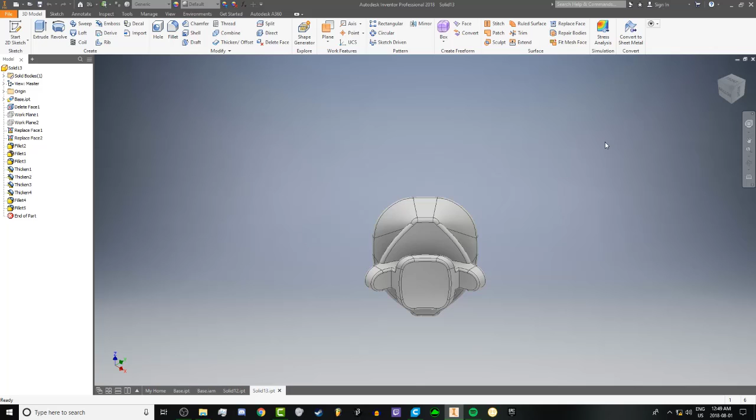What's going on, guys? This is Multi-Cubing here, and in this extra episode of the 2x2 tutorial series, I'm going to show you quickly how to make both the two other main types of locking mechanisms for a 2x2. The first one I'm going to show you is the mechanism that the Chuwen 2x2 uses, where a corner locks into the edge.

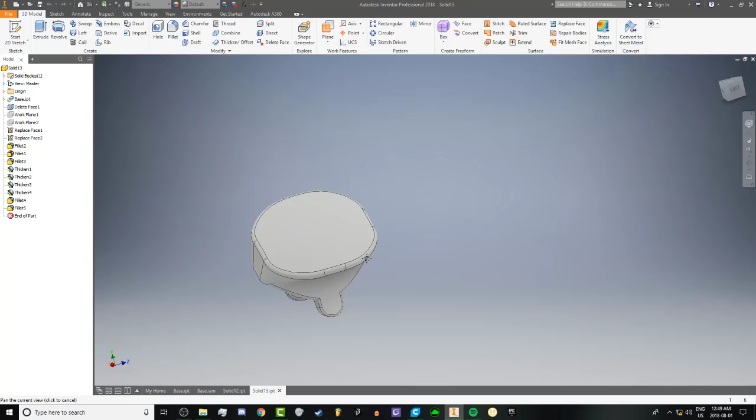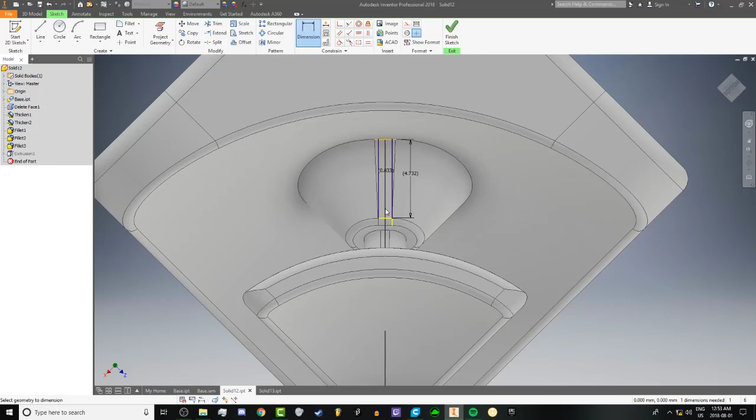Okay, so here's how you want to do this. First thing you want to do on the corner is make something that is going to go into the 2x2 piece. So it's just under a millimeter thick, which is definitely too thin. So I'm going to undo that.

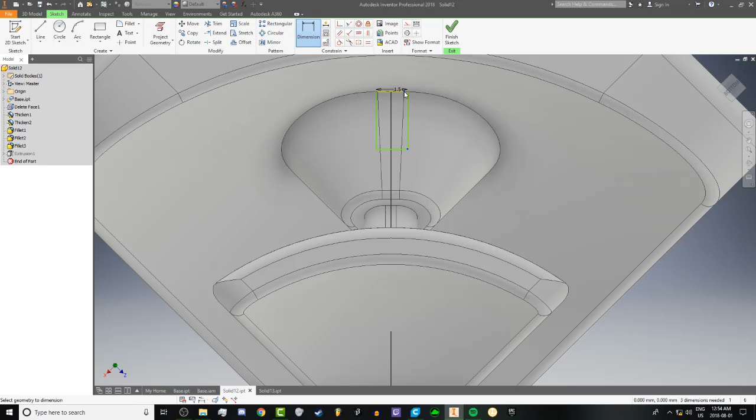So now we can actually dimension this. 1.5, and make this 3. And then we're just going to make a point in the center of this, and then again in the center of this, and then we can make an axis from there to there. Good.

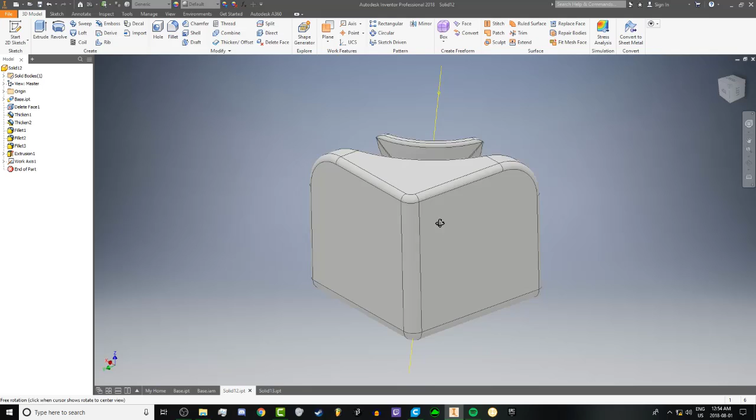Now we can circular pattern this 3 times. Perfect. So now we're just going to do a couple fillets.

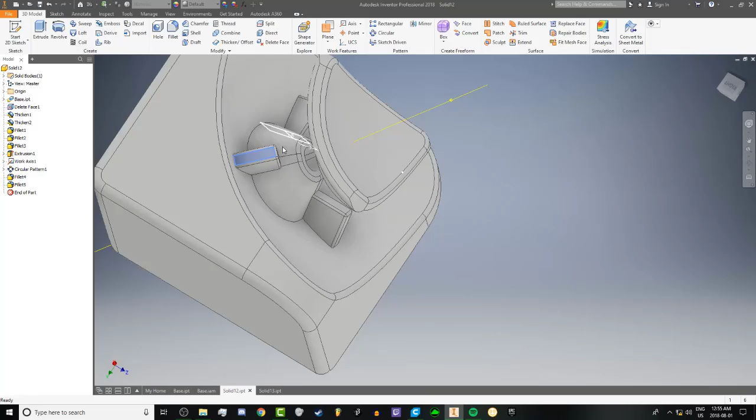Okay, so with that done, we're going to move on and do the work on the edge. Remember, it's 3 long and 1.5 wide. Then we're going to go to the edge and do the same kind of thing.

Now, because of the weird orientation of this edge, as you can see, I would need this axis to be going right through here, or be parallel to a line going right through there. But since everything's off by a few degrees, it's effectively impossible to make the rectangle cut out in this edge that is needed. However, you could probably do that with another edge, but I'll explain how you would do it.

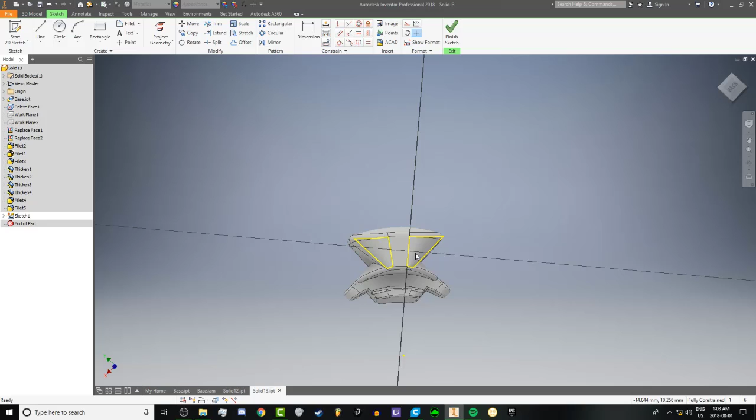You make a rectangle going in the same amount that the rectangle stuck out of the corner, so 3 millimeters in, and then 1.5 wide. Do the usual fillets, and that's it. You would just cut all the way across here, and you would be fine. So I apologize that I cannot show you the full process for that, but this edge is impossible to work with. So, moving on to the next method.

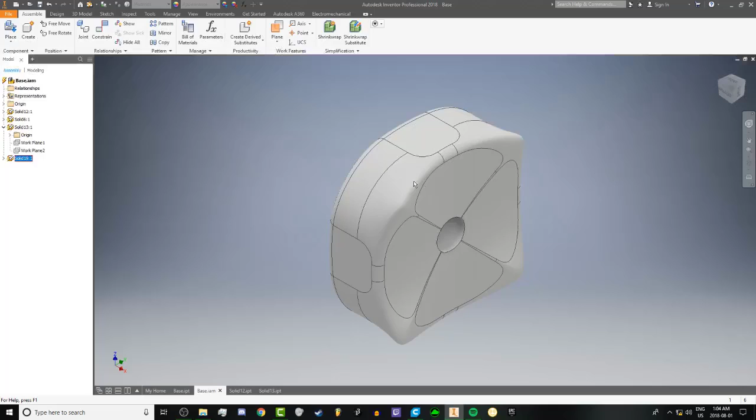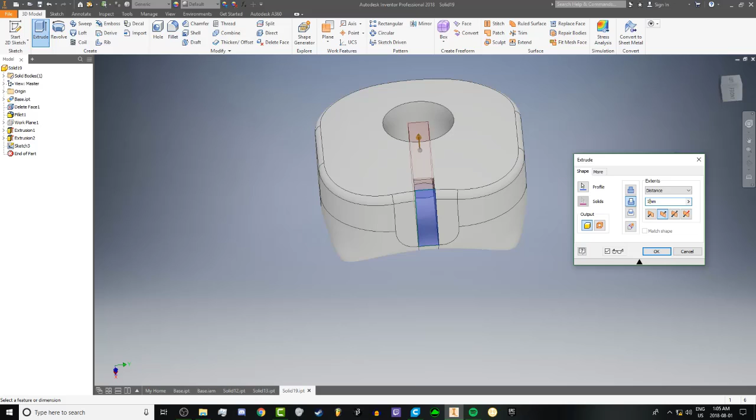Okay, the second way is to use the center. Now what you've got to do for this is something very similar to what we just did. You need to make a hole in the center piece and a hole in a thing sticking out to the edge into the center piece, basically, like so. So here's the slot.

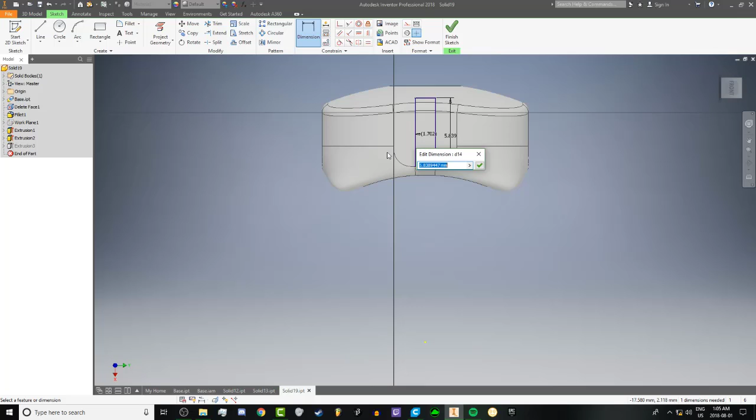And this is 1.7 wide and 5 millimeters tall. And then you would just go here and you would do the exact same thing. Then you'd finish it and extrude it, and that's it. And that would go into the center piece.

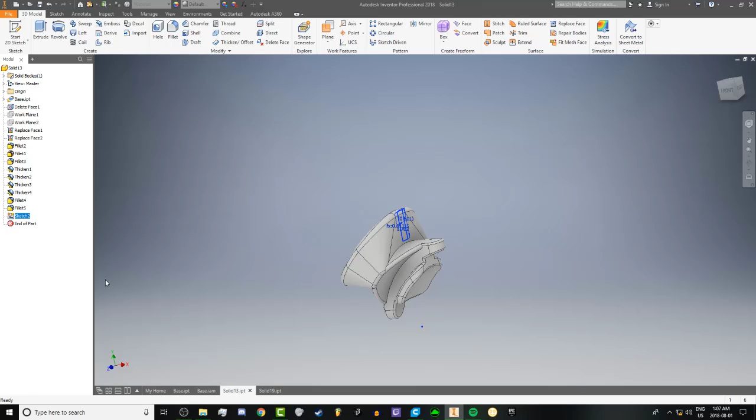So those are the two methods for how to connect everything you need. All the cases result in a corner basically being bandaged to 3 centers around it. And the key difference with these two other methods is that it allows all the centers to be tensionable and makes the cube better because of that.